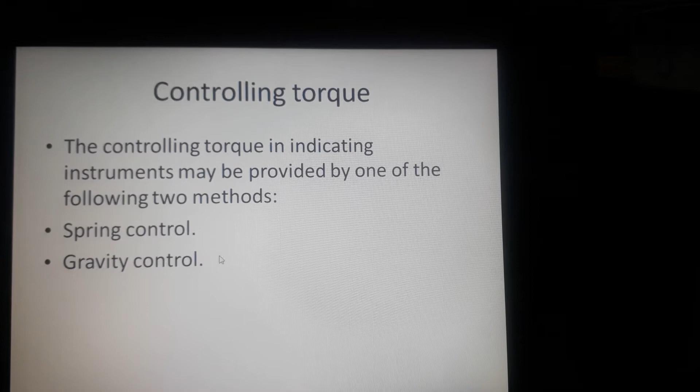This is regarding control torque. Controlling torque in an indicating instrument may be provided by one of two methods. These are the two major methods by which control torque can be produced: first is spring control and the second one is gravity control. First is the spring method.

A spiral hair spring made of some non-magnetic material is used. This is very important: it should be a non-magnetic material. The spring, made of non-magnetic material like phosphor bronze, is attached to the moving system as shown in the figure. The springs also serve the additional purpose of leading current to the moving system.

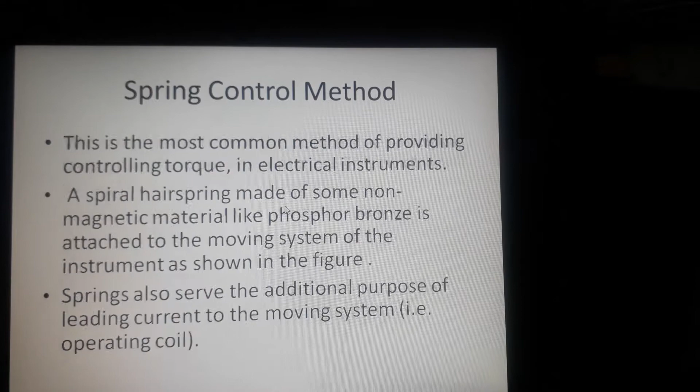From the 0th position, it goes for a deflection, so a deflection is produced. This is your 0 and this is your deflection. Once it moves, a controlling torque will be produced. And once the supply or the input has been taken off, it comes to the rest position. That is regarding your controlling torque. So this twist in the spring provides the controlling torque.

Since the torsion torque of a spiral spring is proportional to the angle of twist, the controlling torque Tc is directly proportional to the angle of deflection of the pointer theta. If you consider this as the 0th position, the difference between these two is your angle. This angle is proportional to your control torque. So Tc is directly proportional to theta.

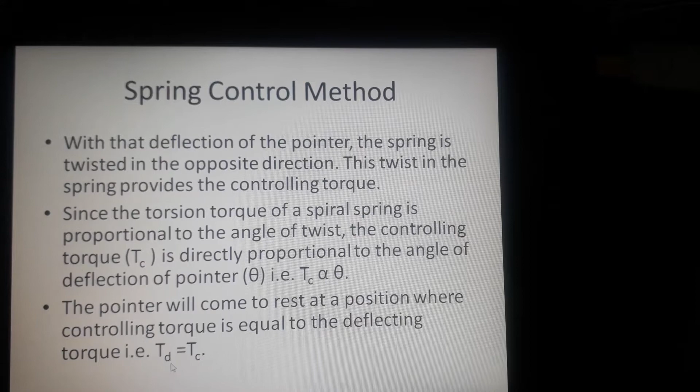So the pointer will come to rest at a position where controlling torque is equal to deflecting torque, when Td is equal to Tc. In an instrument where the deflecting torque is uniform, spring control provides a uniform scale over the whole range. So if it is uniform, it will provide a uniform scale. Uniform deflection will be there.

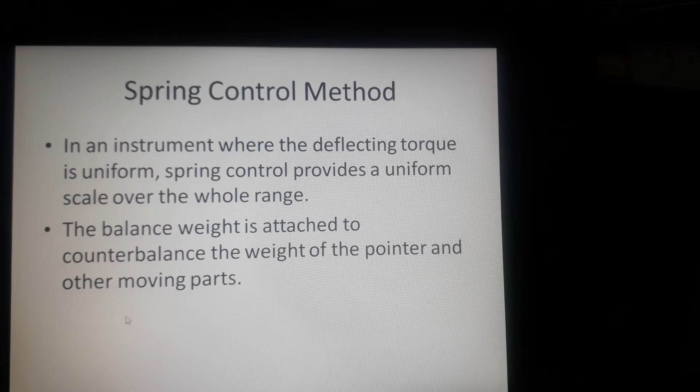The balance weight is attached to counterbalance the weight of the pointer and other moving parts. So in this spring control method, a balancing weight is provided. This weight will be balancing all the moving parts.

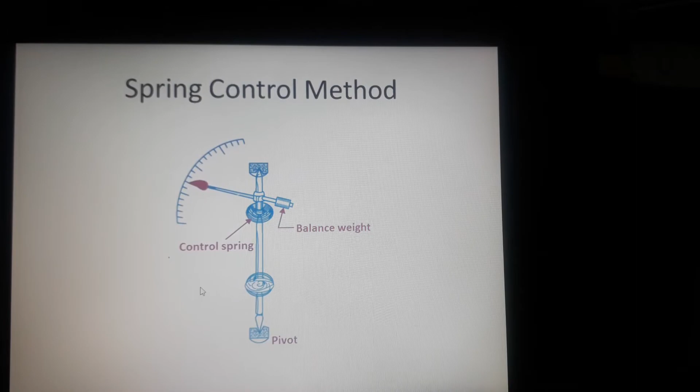In the 0th position of the pointer, the control weight hangs vertically downwards and therefore provides no control torque. In the 0th position, it is not going to give any deflection.

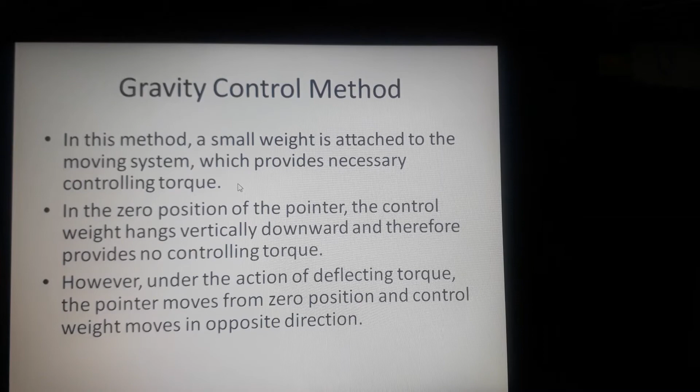Under the action of deflecting torque, the pointer moves from the 0th position, and the control weight moves in the opposite direction. If this is the 0th position and the pointer tries to move this side, this control weight moves in the opposite direction.

Due to gravity, the control weight would tend to come to its original vertical position, and thus provides an opposing or controlling torque. The pointer comes to rest at a position where controlling torque is equal to the deflecting torque.

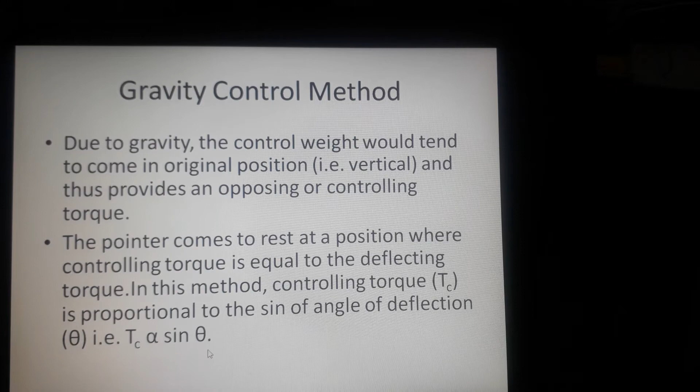In this method, Tc is directly proportional to sine theta. Once it goes for deflection, this control weight will move in this direction, and an angle is produced; sine theta is directly proportional to the controlling torque. Because in this method controlling torque is not directly proportional to the angle of deflection but to sine theta, gravity control instruments have a non-uniform scale, crowded in the beginning.

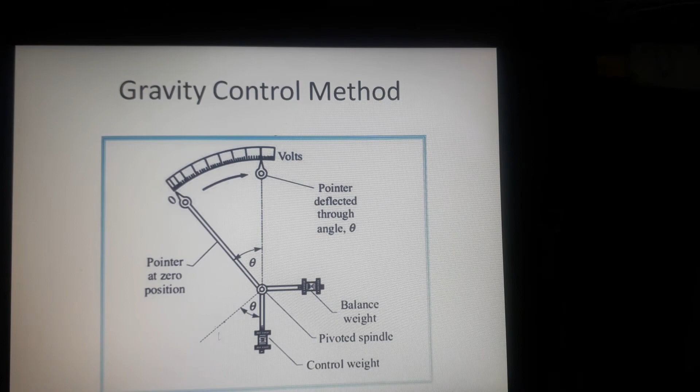Here, this is not directly proportional. Once this pointer moves from this position, my control weight moves from here to here. So the control torque is proportional to the sine of this particular angle in the gravity control method.